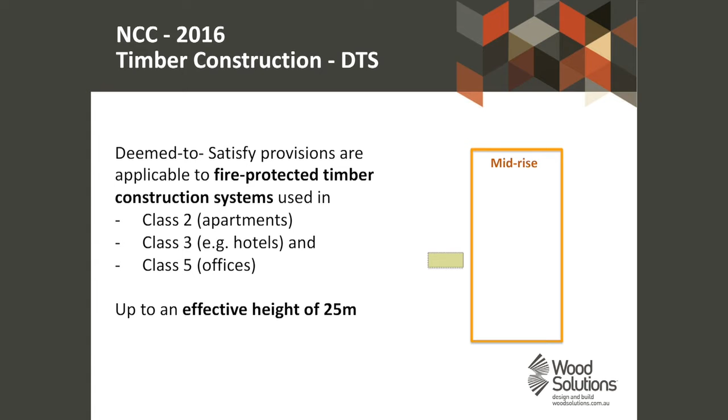Before my time coming back to Australia, in 2016 the National Construction Code changed to include timber buildings into a category classed as mid-rise buildings. So mid-rise buildings, we're talking about structures up to an effective height of 25 metres, or approximately 8 stories high. These types of buildings include apartments, hotels, office blocks, and Jeremy will be talking about a case study after myself.

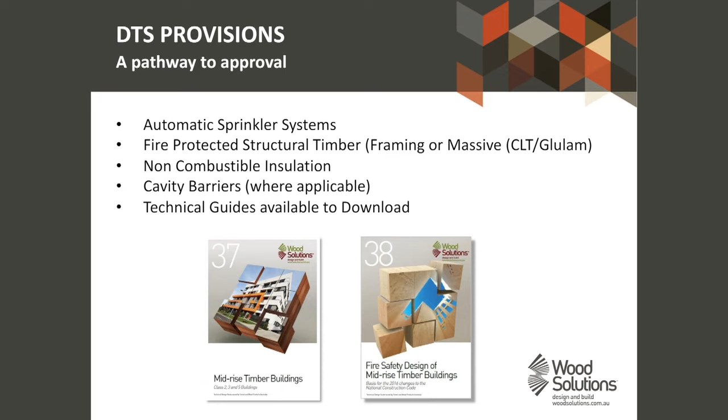WoodSolutions have put together a document, technical guide number 37, for information - I recommend you download it - and it gives you a pathway to satisfying this code. That pathway will include things like inclusion of automatic sprinkler systems, the fire protection of the timber, very important, insulation types, cavity barriers, and the really important detailing surrounding that. They're available for download.

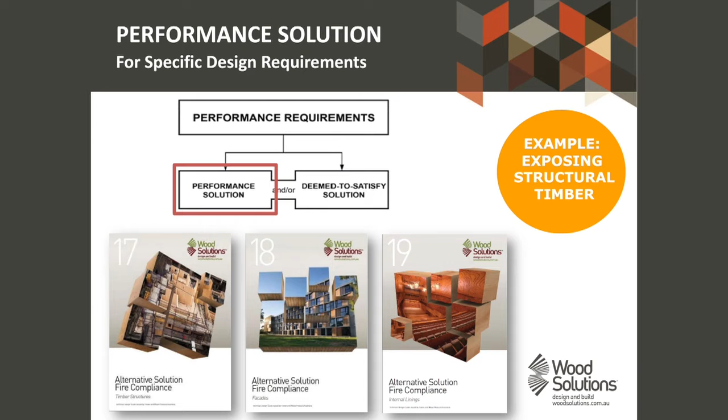Alternatively, if you don't follow that pathway, that deemed to satisfy condition, there's alternatives for you. There's the performance solution. So for example, if you had a structure where you wanted to expose a timber soffit to a ceiling, or timber lined walls, or some other architectural feature that meant you couldn't satisfy that deemed to satisfy option, you can go down the performance solution, and there's guidance documents to help you with that.

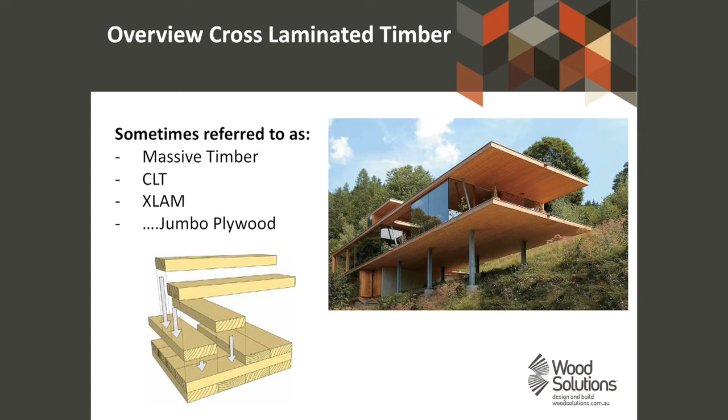So what is CLT? It's had a number of names - it's been called massive timber or mass timber construction, CLT or XLAM, even jumbo plywood, which is not too far away from the truth, really. Effectively, CLT is a large homogeneous panel, significant in size, made up in layers. The layers are effectively boards laid one after the other on a flat bed. On top of that board will be a layer of adhesive sprayed on top. Then the next layer of boards are placed orthogonally, or perpendicular, to the first layer, similar to plywood, and the next layer again placed 90 degrees to that. So very similar in its properties to plywood, and that gives it an inherent stiffness and strength.

So headline benefits - it's got all the things we love about timber. It's got a very high strength to weight ratio, and CLT products are manufactured off-site. So we're talking about CNC machinery and all the good manufacturing processes that deliver lots of value to a project.

Minimum 3 layers, 3, 5, 7, that sort of layering, and the outer layers and their orientation dictate the primary span of the panel itself.

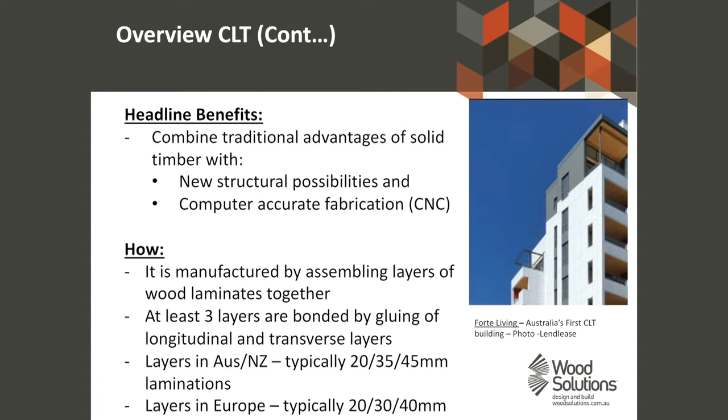In Australia and New Zealand, the laminate thickness is typically 20 mil, 35 mil, 45 mil. In Europe there's a slight variation from that, and the reason I mention Europe is that some CLT product is brought into the country from Europe. So, panel sizes and panel thicknesses.

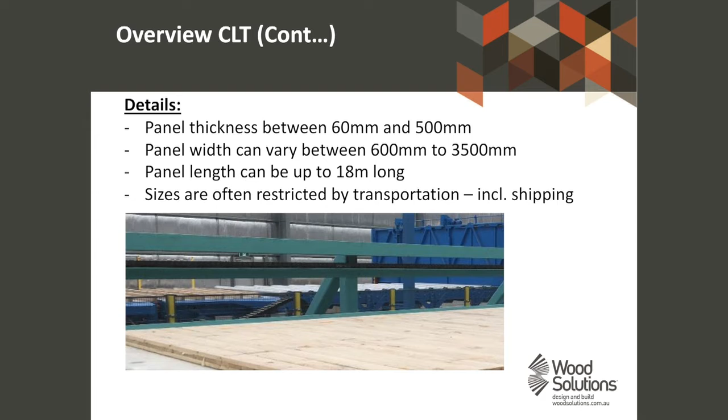It could be anything from 60 mil thick to maybe half a metre in depth. Half a metre in depth, you may be talking for a big span floor, a large span of the floor. The widths can be between 600 mil and 3.5 metres. If you think about a commercial building, typical floor to ceiling height might be about that sort of region, 3.5 metres. And the panels can be made up to 18 metres long.

Now, manufacturers can make that size of panel, but it comes with a caveat in terms of transportation. Transportation is going to be a constraint. If it's coming from Europe, for example, you might be limited to a 40-foot shipping container, so you're talking about approximately 12 metres there. Alternatively, if you find a local supplier from the place of manufacture to your site, there might be traffic restrictions that might also limit the length of panels.

General properties of CLT: we've talked about the strength and stiffness, the strength to weight ratio. It's also similar to reinforced concrete in that it's two-way spanning, so it can span in 2 directions. If you think about a typical floor joist, it would be single spanning, spanning from just one direction, whereas this can span in both directions.

However, most panels are designed to span in the primary direction. The adhesives used in the process are polyurethane, and these are effectively now formaldehyde and solvent-free. There's a link between formaldehyde and carcinogens.

And the species - most of the species available in the markets are softwoods. In Australia, you're talking about radiata pine. In Europe, it's spruce. There are rumblings about hardwood options for CLT. I'm not sure if it's commercially available, but I know the industry is talking about it.

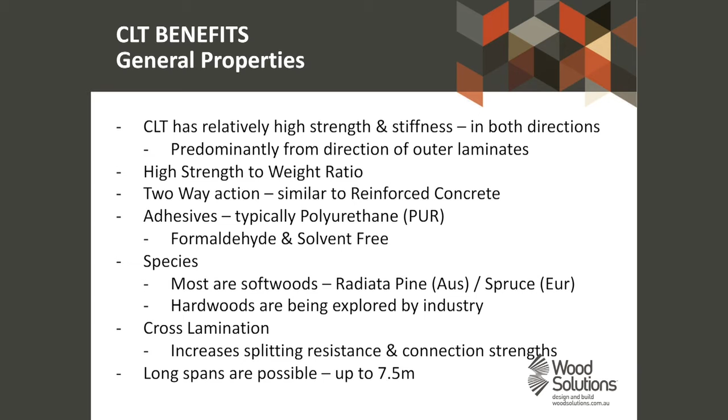One of the other good things about CLT and the cross-lamination is that it increases the splitting resistance of timber. It does. And also the breadth and depth of the connections can be quite robust - it gives you the overall surface area, generating a really good connection.

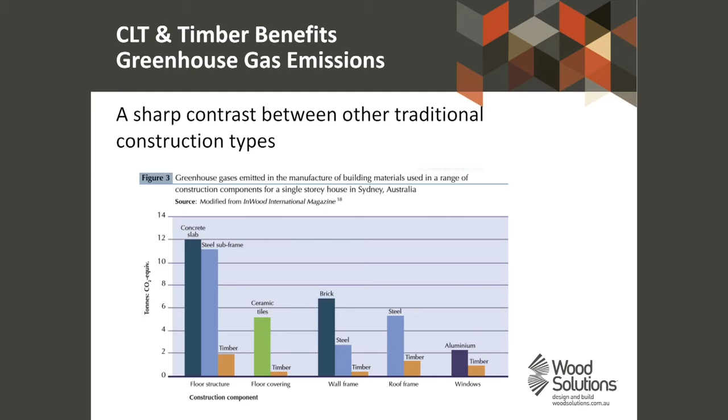The benefits of using CLT as a product in your building: in this day and age, it's hard to ignore the responsibility we have, particularly with projects and the landmarks we leave behind. When you think about the greenhouse gas emissions that come from the production of concrete and steel, and compare timber beside it as a stark contrast, it's one that's hard to ignore and something that will generate lots of interest, no doubt.

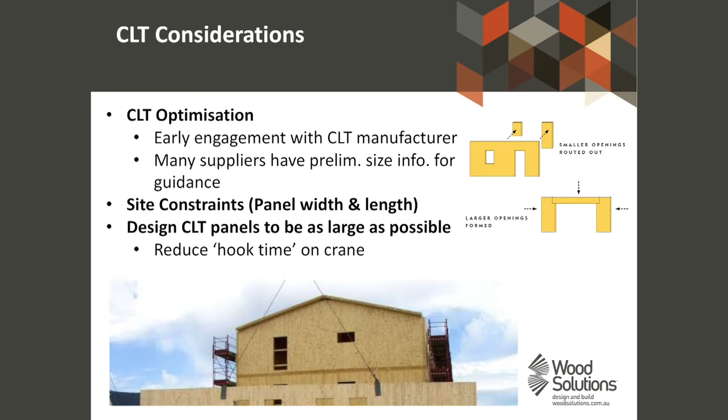So, considerations. If you've got a project at preliminary stages, the first thing I recommend is to engage with the manufacturer, because they're going to give you really good information in terms of overall sizes, delivery, and construction techniques. They'll talk to you about things like window and door openings and how they can be best configured - should they be machined out with a CNC router in the manufacturing environment, or is there another way of optimizing and configuring it differently? They'll give you options and guidance.

They'll also talk to you about site constraints we mentioned earlier. But at the same time, as part of the manufacturing process, for them to give you the best efficiencies, they probably want to go for a large panel. There are two benefits to that: efficiencies in the price of the product you receive, and the project benefit of reduced hook time on the crane. For mid-rise structures, that's a significant factor not to forget about.

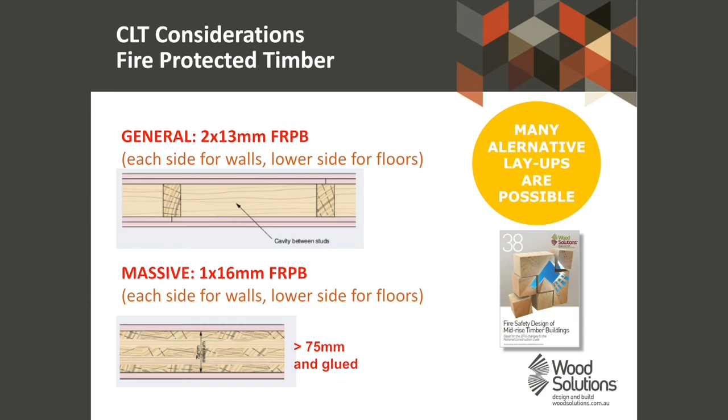Typical stud wall construction on plan, looking at a couple of studs and some noggins between, lined with two layers of plasterboard to achieve a certain minimum fire rating. There are various permutations available for CLT and mass timber within this code change, and that could be something like the bottom part of the slide, which is a single layer of 16mm board in comparison to two layers on the framed wall.

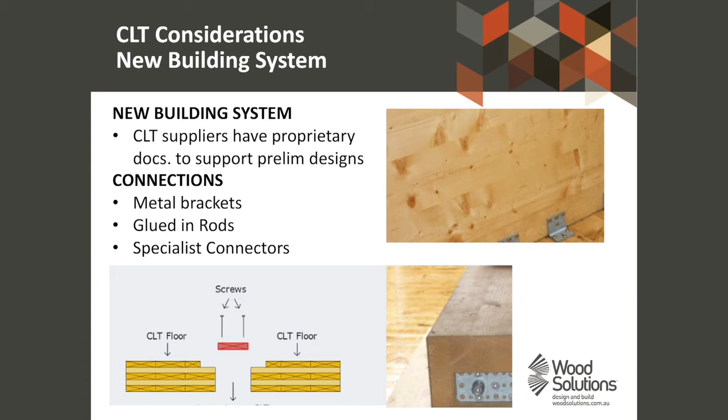The manufacturers as well, they're going to give you guidance in terms of the connection types, whether they be metal brackets, there could be even epoxy resin glues or other variations.

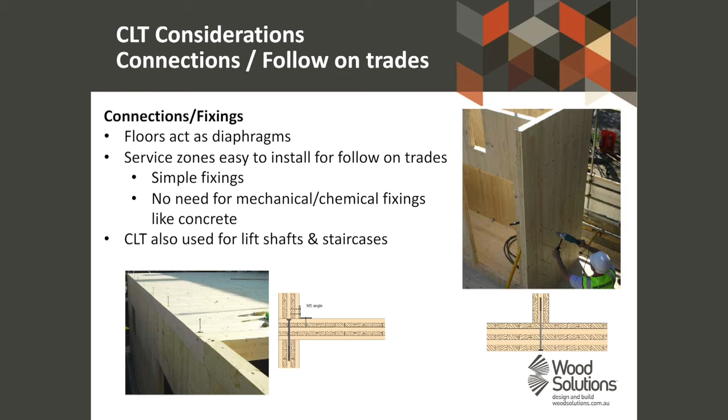And if there's any structural engineers in the room, you might be asking questions like the floor and diaphragm action, and the CLT can offer those benefits and provide that diaphragm action that's needed in buildings, and also in the shape and form of shear walls. So for those parts of the building, like lift shafts, stairwells, that need that robustness and give the overall strength to the building, CLT, there's loads of case studies where that's been the case.

Service zones for follow-on trades - think about electricians, plumbers, other tradesmen coming afterwards. Typically in a reinforced concrete building, they're going to have their arms above their shoulder with a percussive drill, drilling into masonry, mechanical fixings and chemical fixings just to get that ceiling in the service zones. In these sites, you've got tradesmen walking around with screw guns, and that brings benefits in terms of program time and safety as well.

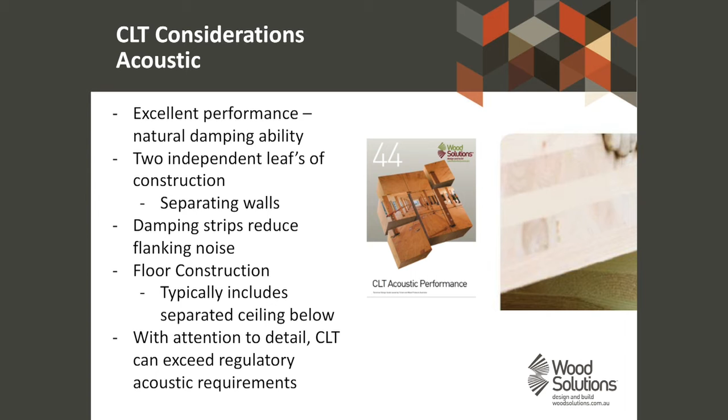Okay, acoustic considerations. CLT has got a natural damping ability, and if it's detailed correctly - and I say that because it's really quite important - your CLT building can exceed the minimum building regulations. You'll see on the right-hand side of the slide, a floor panel's been offered onto a wall panel, and you see a little damping strip there. Not unusual to see that in certain types of construction. That'll help to reduce flanking noise.

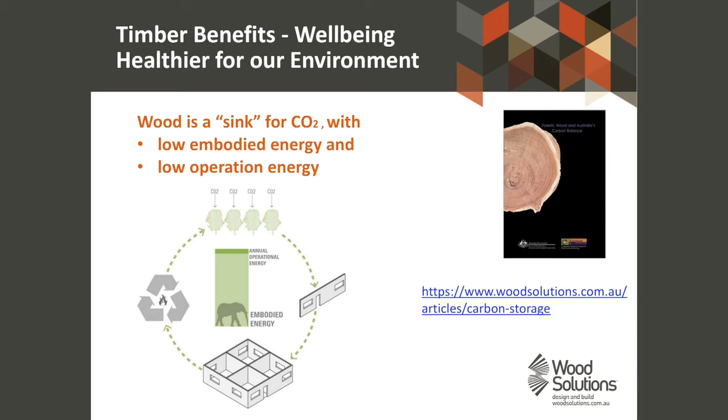Okay, timber, well-being, healthy for the environment. We know about trees, and they release oxygen into the atmosphere via our plantations. In turn, the tree will absorb the carbon in the form of carbon dioxide, and that carbon dioxide will get retained within the tree and therefore into the engineered wood product. Effectively it's sequestered - that's the phrase used a lot - sequestered into the wood product. So if you've got a large CLT panel, a big significant panel, it's going to store a significant amount of carbon, and therefore it is a renewable material from that perspective.

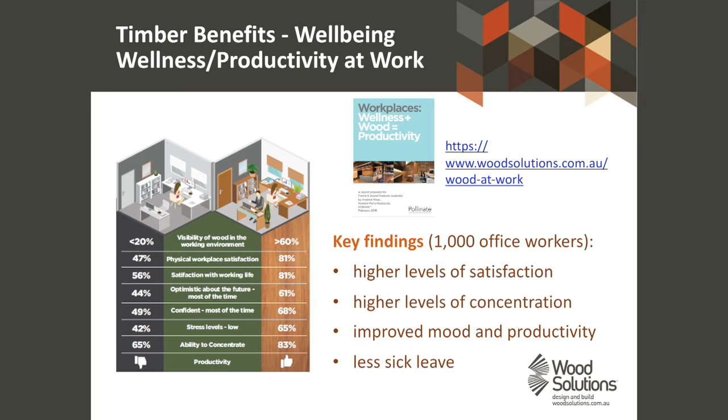Today on your seats, I've left a little study from Pollinate, and they carried out a study on behalf of the FWPA in regards to timber in the workplace and how it affects the productivity of workers. This survey was carried out with 1,000 people. One group had exposure to less than 20% of timber surface area, another group had exposure to greater than 60%, and the findings were really significant: higher concentration, higher levels of satisfaction, higher levels of productivity, less sick leave. There's real potential that could lead to higher levels of staff retention, and all those good things employers need to be interested in. I'd recommend you take it home to your wife, husband, partner, even your boss, and think - maybe we could change things in our work environment, even in the home environment.

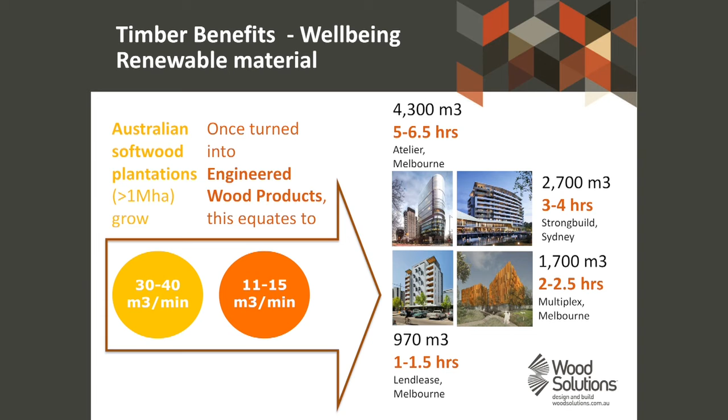Okay, renewable material, I mentioned it earlier on. What do I mean? Australian softwood plantations have the capacity to grow 30 to 40 cubic metres of timber a minute. When you strip away the bark and the branches, and all of that good stuff is recycled and used for mulch, paper, animal bedding, biomass fuel, it leaves you with approximately 11 to 15 cubic metres per minute of engineered timber products that can be used. You then convert that into some of the structures that exist in Australia today, and you've got a growth rate in the period of hours which is significant in comparison to other products that might be available. Concrete and steel, they just can't have that sort of renewable aspect to them.

Costs and benefits - conscious of time here, but some of the things that a CLT building will bring to your project will be faster delivery, lower preliminary costs, and reduced size of foundation, and therefore reduced cost associated with the foundation also.

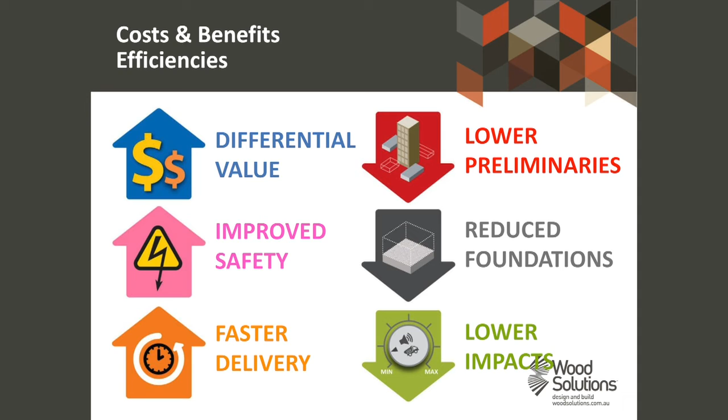The follow-on trades can start immediately. In a reinforced concrete structure, you have to wait for the slab to cure to reach a certain compressive strength before you can release the props and therefore release the other trades. Not the case with CLT - the other trades can get straight at it. This brings program benefits and no doubt cost benefits as well.

Also, the fact that it's an offsite product means that there are shop drawings available, ready to insert into your BIM models if that's something you're using in anger.

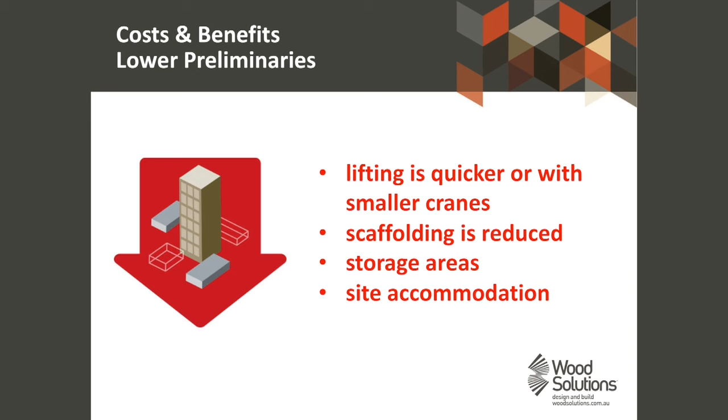Lower preliminaries - it's a substantial cost to any project: the project management costs, the site security costs, site accommodation and cabins, and even scaffolding and the likes. The build time with these off-site manufactured products is significantly quicker, and therefore that cost becomes significantly less as a result.

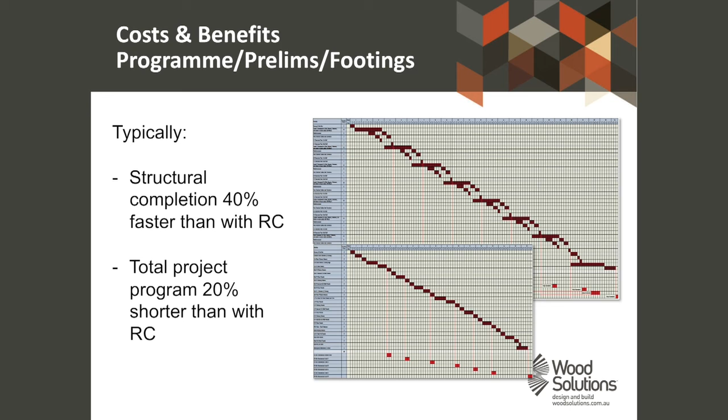Program - typically you see the programs finish 20% quicker, and that's as a result of the fast installation time, the fact that it's off-site. It fits together like a big jigsaw puzzle, but robust in nature.

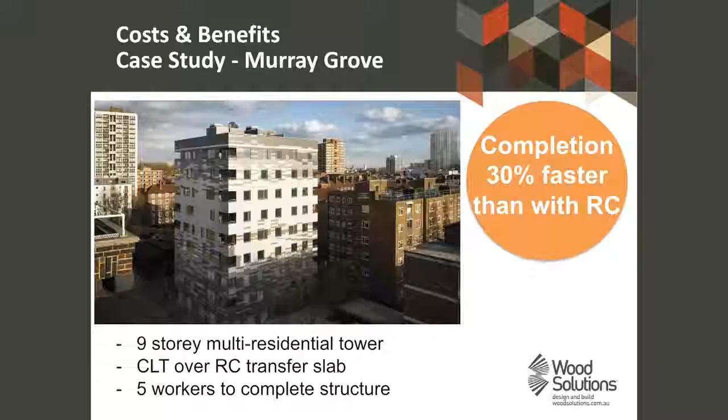Andrew Waugh in London from Waugh Thistleton Architects uses Murray Grove as a case study, and his estimate is that this was 30% faster to put together than a reinforced concrete structure, with a significantly reduced workforce as well - a team of 5 workers. It also has benefits from a safety perspective.

Typical crews for off-site manufactured timber products can install somewhere in the region of about 80 square metres a day, and that includes walls, floors and ceilings.

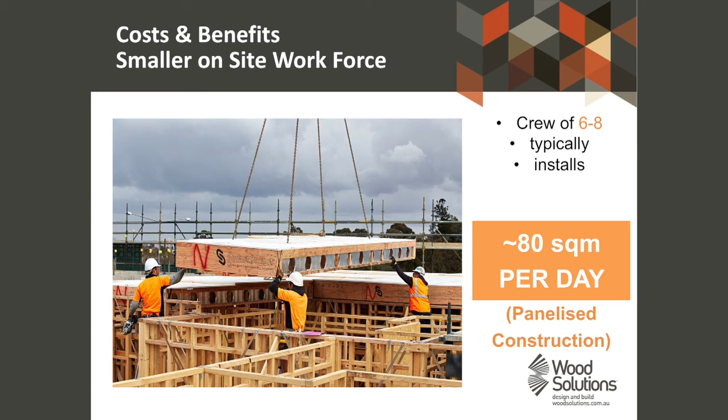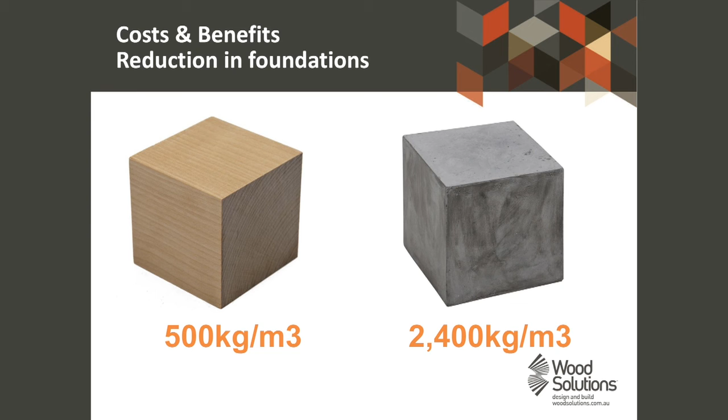Now there are possibly some arguments you'd say - if I bought a metre cube of timber and a metre cube of concrete, the prices might not be comparable. But at the same time, one of the considerations is the weight. There's significantly reduced weight in a timber building than a reinforced concrete building, and as a result you've got smaller foundations, and therefore smaller costs associated with that. In a mid-rise building, somewhere between 4 and 8 stories, that can be a significant number.

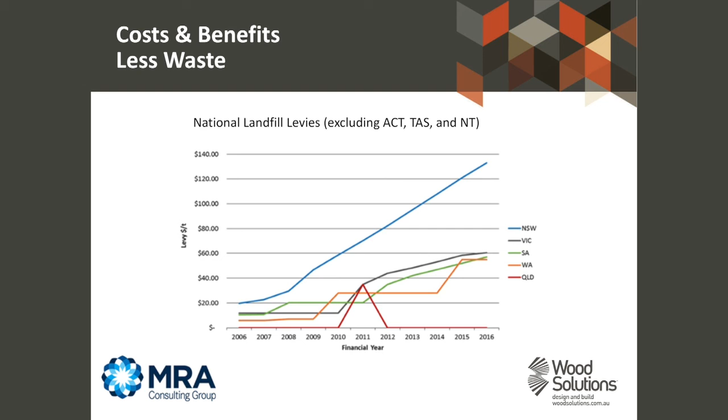This slide, when it came across my desk, was an odd one for me, particularly when I see the costs associated with landfill levies in Australia. The trend is certainly only one way, and it's not going to get any better, I don't think. I think the trend's always going to be upward, and in fact, what I understand is that 40% of Australia's waste to landfill comes from the construction industry.

What I'd say about this is if you're using CLT as an option for your next project, these guys are using manufacturing processes - lean engineering, Kaizen type processes, all of this good stuff that's come from the car industry and other manufacturing industries - and they're driven towards zero waste. You go to a site with an off-site engineered product and the waste is significantly less than what you see tramping around maybe the sites you do see now.

So thinking about the costs of a CLT building and taking away a cost per cubic metre of timber versus a cost per cubic metre of concrete, you've got to look at the whole life cycle of the project rather than just the cost of the product itself.

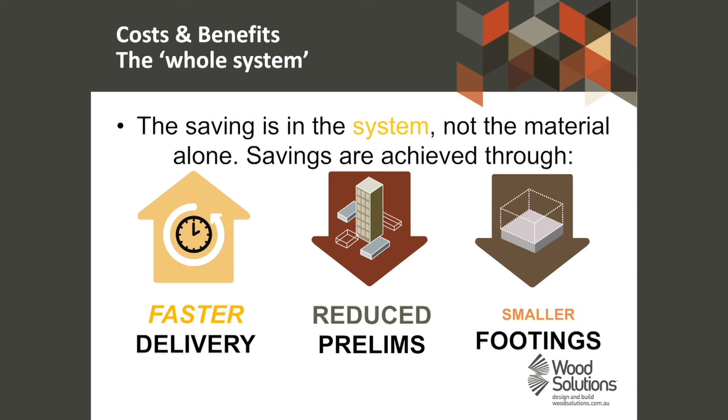So in summary, we've got CLT as an option for your next project or the developments ahead of us in Adelaide and South Australia. There's the safety factors, the speed of construction to consider, clean and significantly reduced number of deliveries to site, and it's renewable. I'll leave you with this last slide here on how you use timber in your next project.